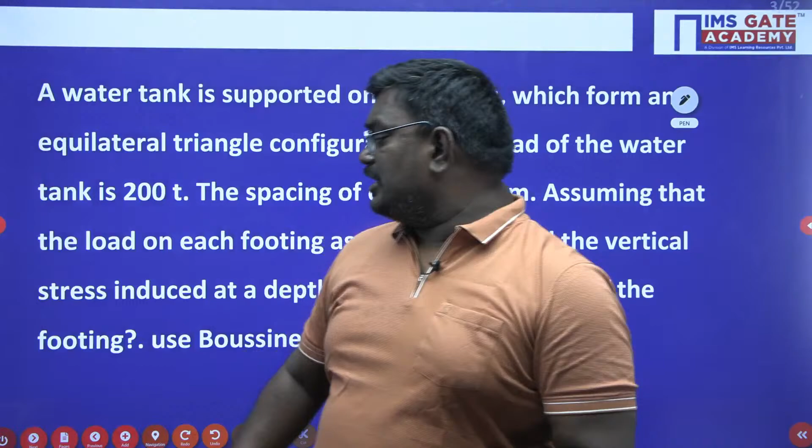Now see students, what is the agenda? In the top 10 challenging questions, we want to discuss the best questions. My dear students, always remember that whatever activity we do on the YouTube channel is from the perspective of students getting benefited. Now I don't want to waste your time, and I will quickly start the questions, students.

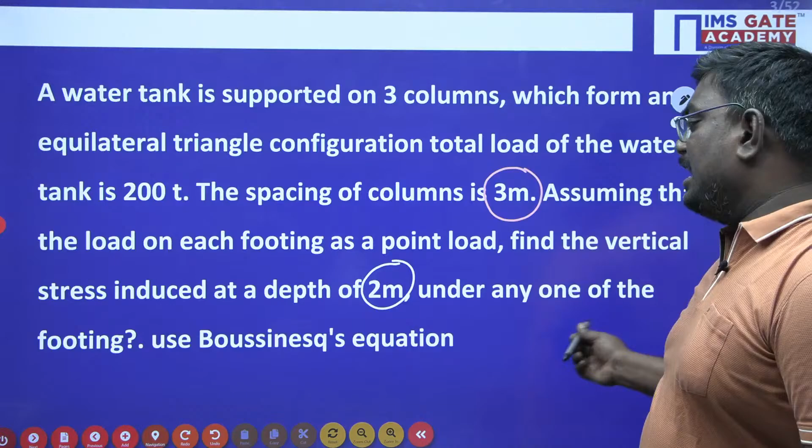Now the first question is: a water tank is supported on 3 columns which form an equilateral triangle configuration. The load of the water tank is 200 tons. The spacing of the columns is 3 meters. Assume that the load on each footing is a point load, and find the vertical stress at a depth of 2 meters under any one of the footings using Boussinesq's equation. So it is a very good question from the point of view of stress distribution.

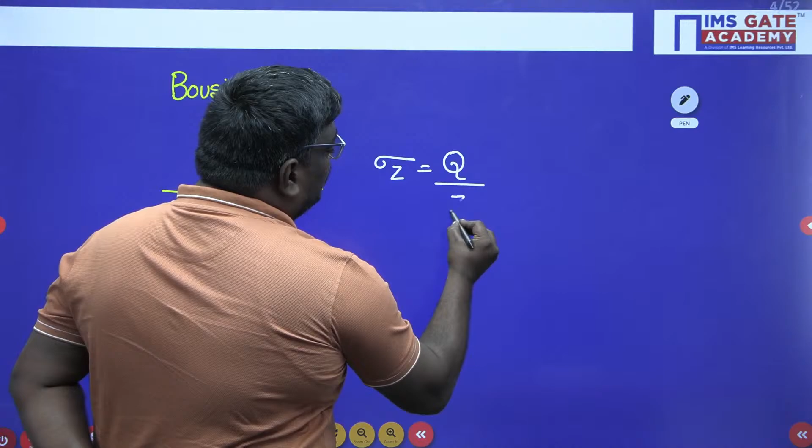Now my dear students, first let me tell you what Boussinesq's equation is before solving this problem. The equation is simple: Boussinesq's equation says that sigma z... suppose if I consider this as a soil strata and the depth of the soil strata as z, here we have a load Q, which is a point load, and the stress at a radial distance R at a depth Z. The formula you have to remember is sigma Z equals Q by Z square into 3 by 2 pi into 1 upon 1 plus R by Z whole square, whole power 5 by 2.

Now see students, this formula might be somewhat tough, but you have to remember this formula. Now what is R here? R is the radial distance, and Z is nothing but the depth of the soil strata.

Now let us discuss this question, students. There was a water tank which has 3 columns, and the water tank is carrying a load of 200 tons. Are you getting, my dear students? The water tank is carrying a load of 200 tons. Now see students, how much load has to be taken by each column is very important.

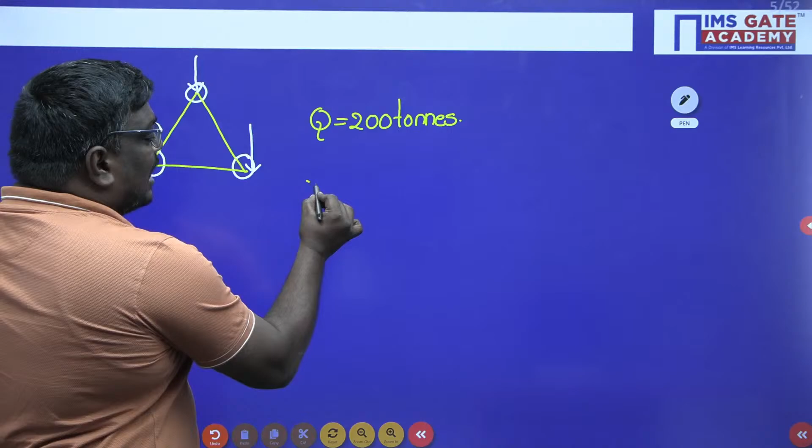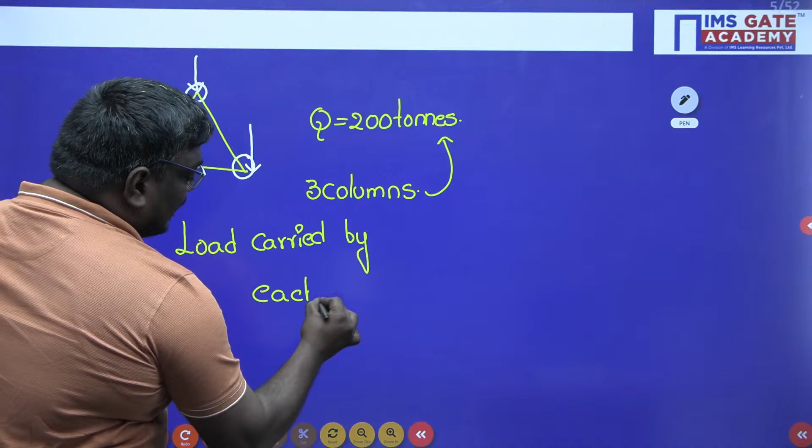Very good afternoon, Vishweshwar. So here there are 3 columns, my dear students, and the total load carried is 200 tons. So what is the load carried by each column is important. Load carried by each column can be taken as 200 upon 3. So there are 3 columns carrying 200 tons, so the load carried by each column is 66.66 tons, where T means tons.

Now my dear students, the spacing between the columns is evident, clearly they have given it as an equilateral triangle. So all the sides are the same, and the spacing between the columns is given as 3 meters in the problem.

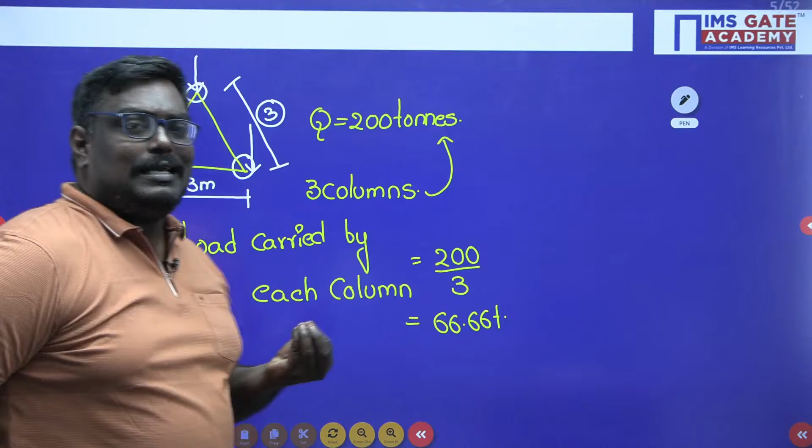Now what is this problem trying to ask, my dear students? What is the stress acting at any one of the columns when there is a point load acting on it? For easy calculation, I will assume this as first column, this as second column, and this as third column. You can assume any column as numbering - numbering is not an issue.

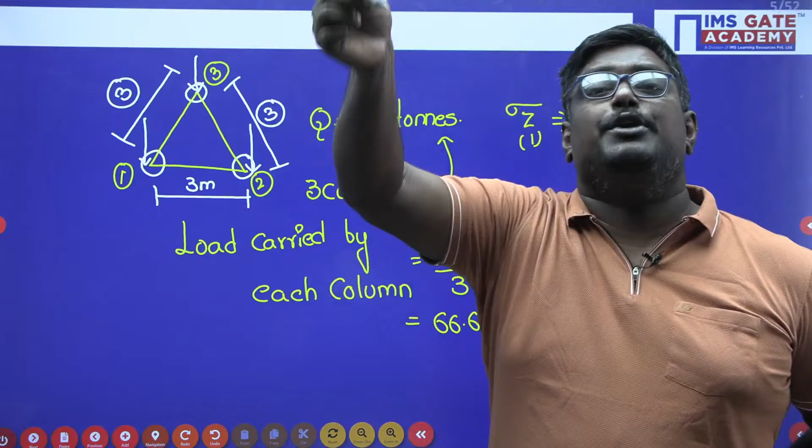But my dear students, when I explain the stress at a depth Z at column 1, you have to understand this logic: the stress of column 1 due to column 2, the stress of column 1 due to column 3, and the stress of column 1 due to its own load. So you can write the stress at a depth 2 meter on column 1. The beauty of this question is he has asked for the stress distribution on any one of the columns, not a particular column - it can be any column, my dear students.

So here the stress can be taken as sigma 11, that is stress on column 1 due to column 1; stress on column 1 due to column 2; and stress on column 1 due to column 3. So you have to find out these things.

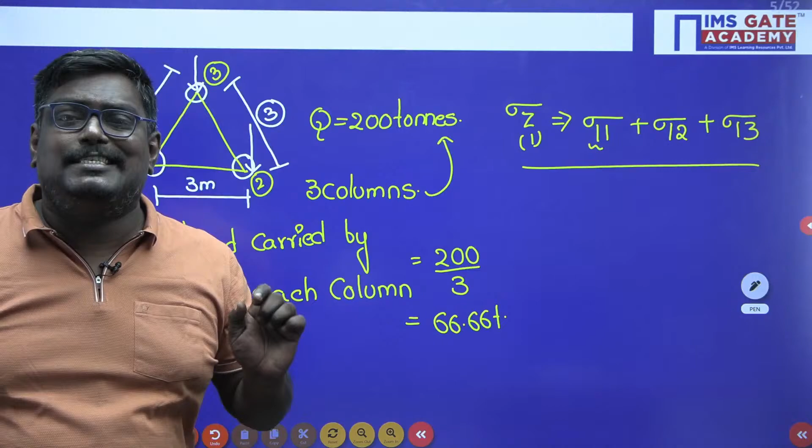Now my dear students, if the load is acting exactly on the column, for column 1 there will be no radial distance - radial distance will be 0. When I talk about column 1 and 2, there will be a radial distance of 3 meters, because column 2 is located at 3 meters from the first column. Similarly, column 3 is located at 3 meters. Now I hope you are clear.

Now see student, if I have to find sigma 11, the formula here is Q by Z square into 3 by 2 pi, into 1 upon 1 plus R by Z whole square, whole power 5 by 2. So this is the Boussinesq equation. Now my dear students, let us calculate what is the load here.

66.66 tons divided by Z square, which is 2 square because Z, they have asked you at a depth of 2 meters, into 3 by 2 pi. And this entire term will become 1 because R is 0 - if R is 0, this entire term becomes 1. Now if you solve this, my dear students, the stress on column 1 due to the load at column 1 will be 7.95 ton per meter square.

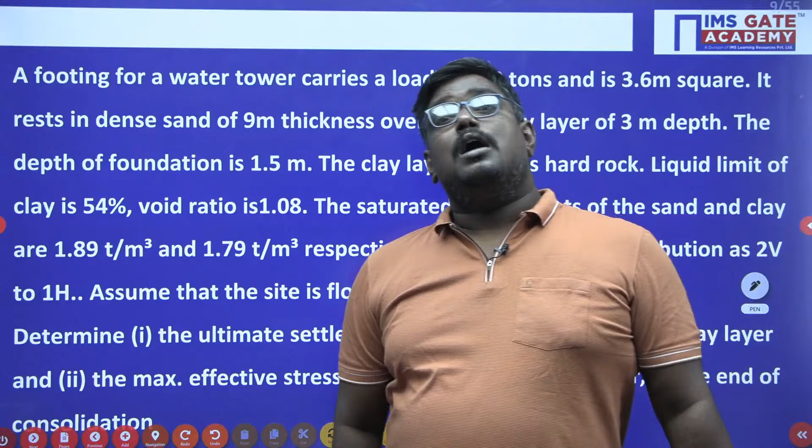So let us go on to the next question. My dear students, this is one of the beautiful questions in consolidation. Sir, what do you mean by consolidation? Remember, consolidation is nothing but the removal of water from the voids under a static long-term pressure. Now let me tell you one important thing.

The question is: a footing for a water tower carries a load of 900 tons and it rests on a dense sand of 9 meter thickness overlying a clay layer of 3 meter thickness. Depth of foundation is 1.5 meter. The clay layer has a liquid limit of 54 percent, void ratio 1.08, saturated unit weight of sand and clay are 1.89 and 1.79 ton per meter cube. Assume the load distribution is 2 vertical to 1 horizontal.

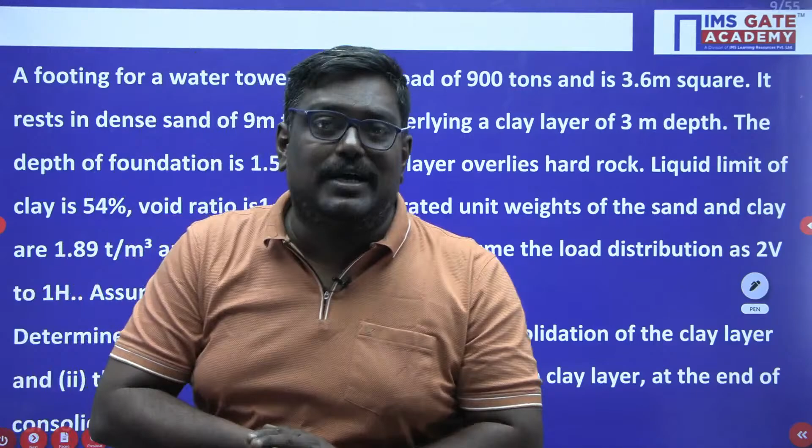Assume the site is flooded - this has a huge meaning, my dear students. It is my sincere request, whenever you are writing the GATE exam, you have to take a minimum 30 seconds, if the question is large, you have to read the question carefully and understand the given data.

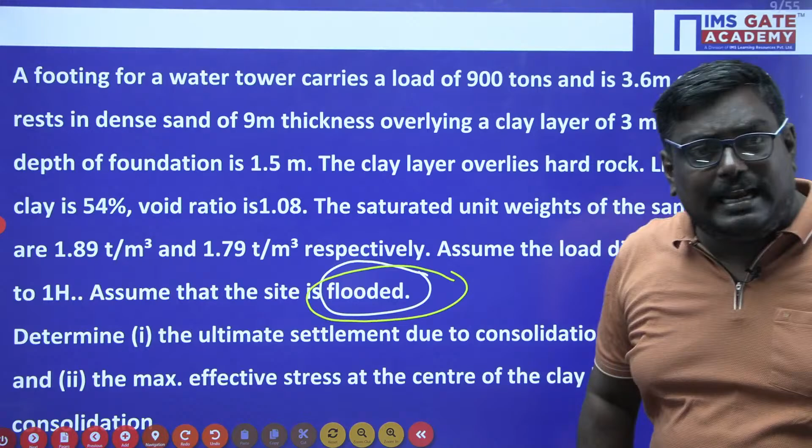Now, what is the ultimate settlement due to the consolidation of the clay layer? And the second one is the maximum effective stress at the center of the clay layer. So they have clearly asked us what is the settlement and what is the final effective stress. Now see, how do you calculate settlement?

Sir, whenever some question is asked, you have to understand - first they have asked you settlement, so what is the formula for settlement? Sir, in IMS Academy, we have done smart revision, formula sheet.

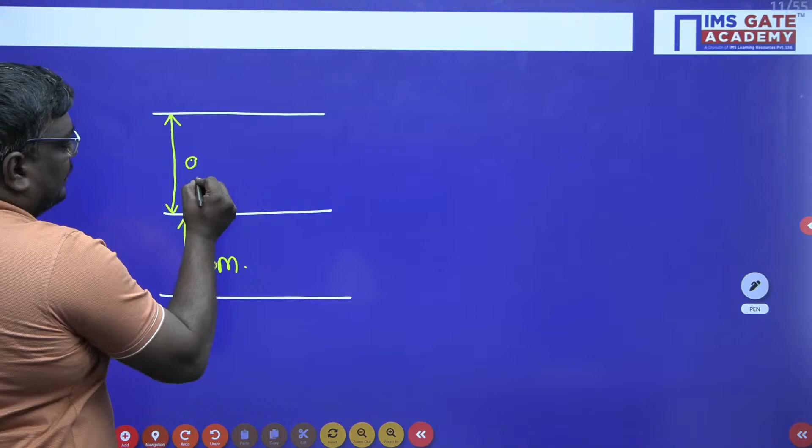On top of it, there is a sand layer of 9 meters. And for your information students, here we have a foundation which is of thickness 1.5 meter.

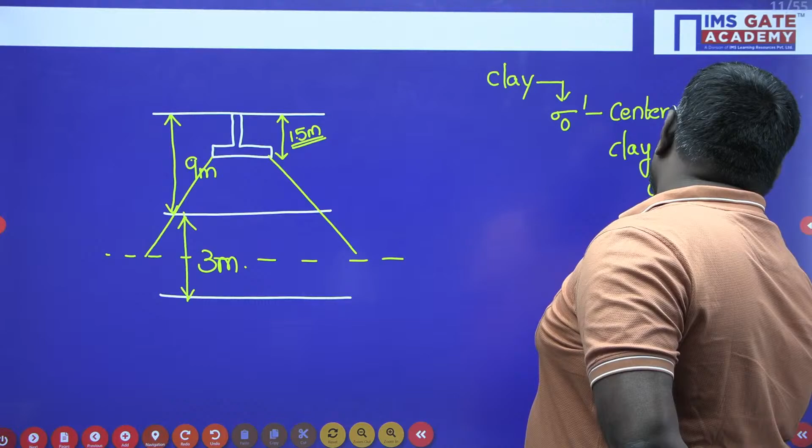Now we have to calculate the stress at the center of clay layer. This is a very important point in calculating the consolidation settlement for clay layers. Consolidation happens only in clay layers. And another important thing is effective stress should be calculated at the center of clay layer only.

Now here we have this is 1.5, so this is also 1.5. So this depth will be equal to 9 minus 1.5 is 7.5. Again 7.5 plus 1.5, so here this is 7.5 and this is also 1.5. So what is the total? Total will be equal to 9 meter.

Agree? Now how do you calculate the effective stress? The most important thing is it is flooded. Flooded means water table at top.

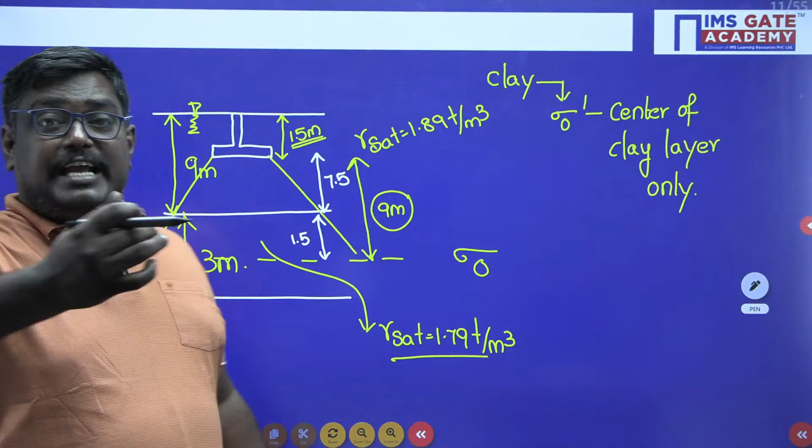Now the sand layer has gamma sat equal to 1.89 ton per meter cube, and clay layer, the saturated unit weight of clay is 1.79 ton per meter cube. If you have observed our quick revision or smart revision or GATE score booster, I have told you how to

calculate the effective stress. Whenever there is a water table, while calculating the effective stress, my dear students, gamma sat will be replaced by gamma dash.

So here you can write effective stress as gamma dash of sand, and the thickness of sand is 9 meter, plus gamma dash of clay, and the thickness of clay is 1.5 meter.

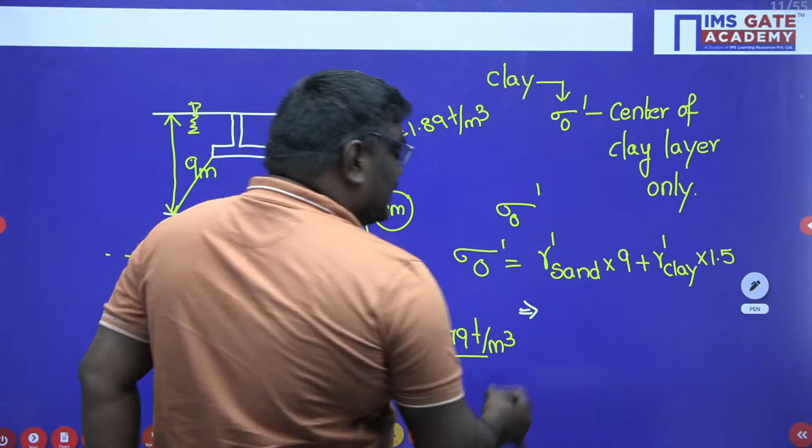Now see, what do you mean by submerged unit weight? It is nothing but the difference between the saturated unit weight and unit weight of water. So here we calculate as 1.89 minus 1 into 9, plus gamma dash of clay is 1.79 minus 1 into 1.5. Now see, 0.9 into 9 is 8.1, and 0.79 into 1.5 will be almost 1.

So if you solve this, you will get a value of 9.19 ton per meter square. So the effective stress sigma naught is very clear for you.

Now how do you calculate the final effective stress? Final effective stress is nothing but the initial effective stress plus the additional stress due to the applied load. Here it has applied a load of 900 tons, and it is a square footing for your information.

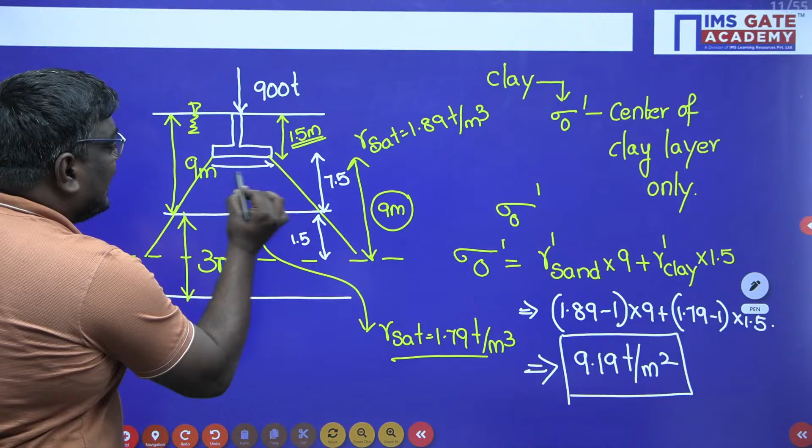So the width of the footing is 3.6. Now how is the distribution? Load distribution, 2 vertical, 1 horizontal. If I find this depth is anyhow 9, and I calculate this value, this will be equal to 9 by 2.

From similar triangle concept, if I take x and this as y, x by y can be written as 1 by 2, so x can be written as y by 2. Here y is nothing but 9 by 2. So the total width is 4.5 plus 3.6 plus 4.5, this will be equal to 12.6 meter. Am I correct or wrong?

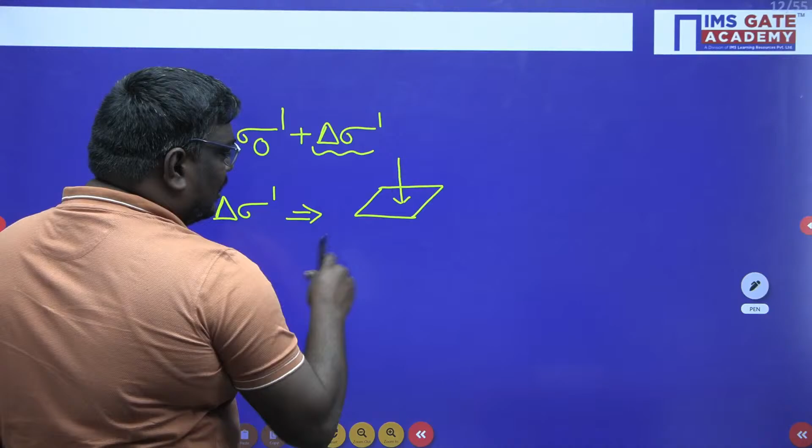So how do you calculate delta sigma? See here, how this will be seen in the problem. Suppose here there is a load acting and the load is supposed to distribute in this way, so it is a square of width 12.6 meter.

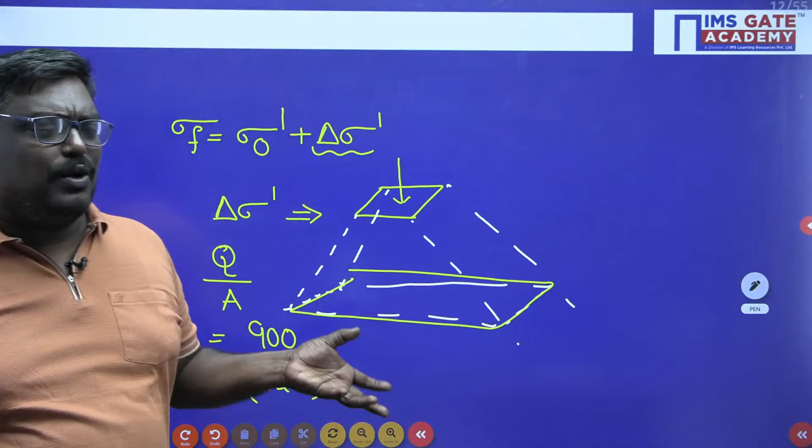Load is 900. Load upon area, load is 900 upon 12.6 square. If you see 12.6 square, it will be around 156 or something. 12 square is 144, 13 square is 169, so 12.6 squared will be around 160 or something.

If you calculate this, you will get a value of 5.67 ton per meter square. What is this value? Delta sigma is 5.67 ton per meter square.

So what is the final effective stress? Initial effective stress is 9.19 ton per meter square, and delta sigma is 5.67, so it will be around roughly 14.86 ton per meter square.

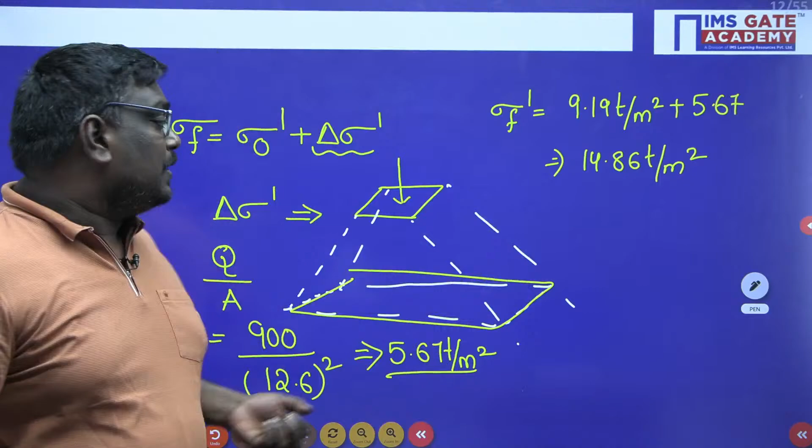So you have known each and every term in the problem. So let us solve here. Delta H is equal to, what is the formula? H into, what is H? Thickness of clay layer. H into Cc upon 1 plus e naught, into log of sigma final upon sigma initial effective stress.

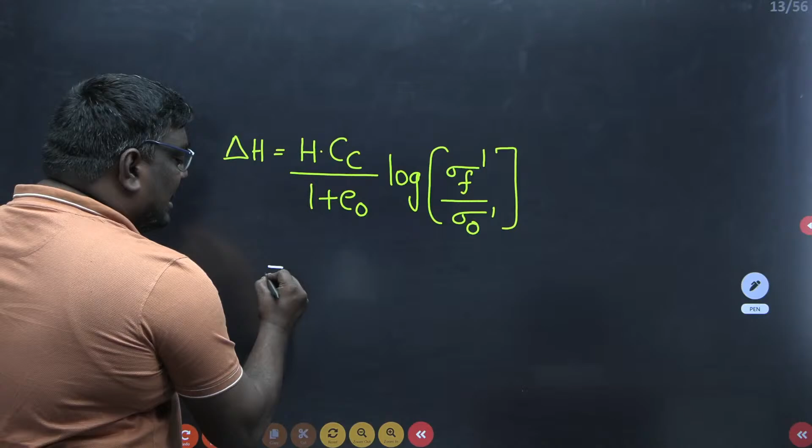So here, what is the thickness of the clay layer? The thickness of the clay layer is nothing but 3 meter. And what is Cc?

0.396 upon 1 plus void ratio is 1.08 into log of sigma final. What do you mean by sigma final here? 14 point, how much sir we got? 14.86 I think. 14.86 upon sigma initial is 9.19 ton per meter square. You will get a value of 0.119 meter. And if they ask you in mm, so 119 mm is the settlement.

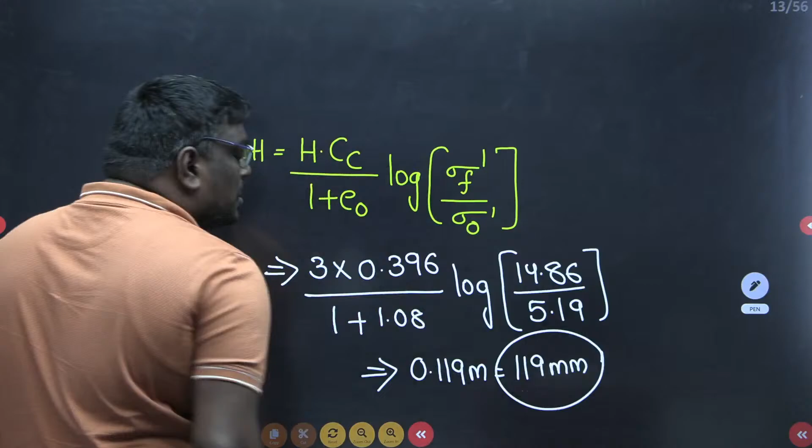So my dear students, let me tell you what are the key pointers in this problem. Whenever they ask you settlement, delta H can be taken as H into Cc upon 1 plus E naught into log of sigma final upon sigma initial. And remember my dear students, H should be taken as thickness of the clay layer.

Effective stress should be calculated at the center of the clay layer. Final effective stress is initial effective stress plus delta sigma. Delta sigma is a kind of stress which is induced due to the load acting. If you calculate the effective stress, it is due to the self weight of the soil, whereas delta sigma is due to the application of the load. When you keep these points in your notebook, definitely you can solve the problem. I hope you are clear, my dear students.

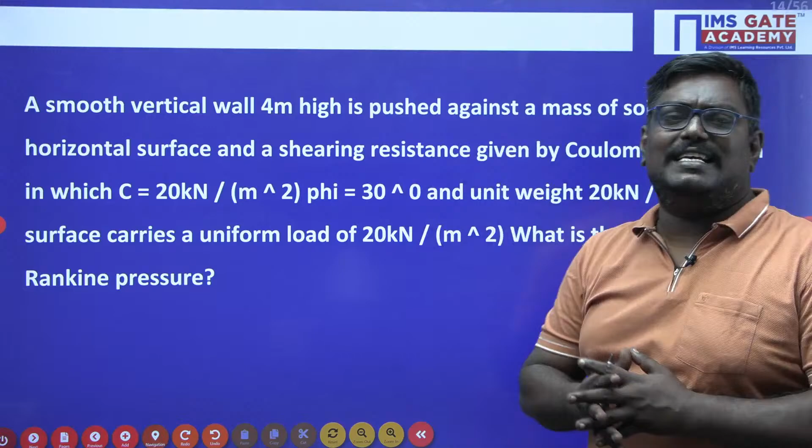Now, let us understand ourselves. Actually, if you see, the question is very simple here. A smooth vertical wall is pushed. This is a very interesting question. In 2021, we have seen this kind of question, my dear students.

Sir, when you are pushing something, it is passive. When you are pulling something, then it is active. When it is stationary, it is at rest pressure. So, my dear students, they will not directly tell you to calculate active pressure, passive pressure or at rest pressure. It's based on the yielding of the soil mass. If the yielding of the soil mass is due to stretching, then it is active earth pressure. If the yielding of soil mass is due to compression, then it is passive earth pressure. If there is no yielding, then it is at rest pressure.

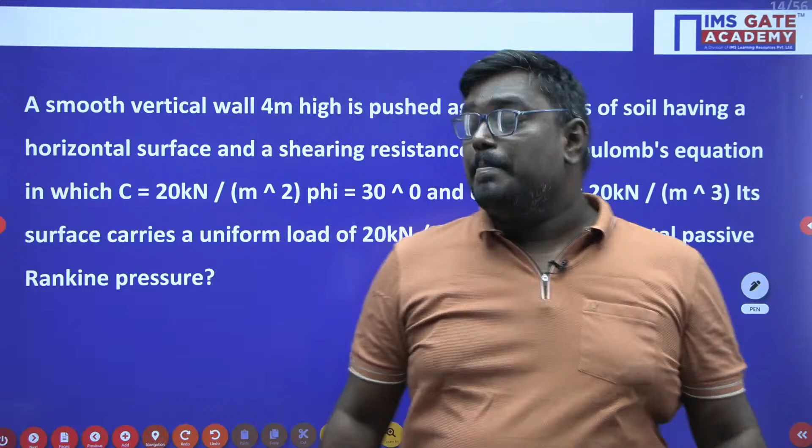So, here shear angle of resistance is C 20, phi 30 degrees, unit weight 20, surface carries 20. What is the total passive earth pressure? Now, let us understand. Sir, we have to calculate the total passive pressure and I will tell you how to calculate the force also. Now, what are the key points to solve this problem?

Sir, this is very important. Whenever you are solving a problem, solving it in a generic way is very important. What do you mean by generic way is, if that question is asked in n different ways, using this generic method, you can solve the problem. So, my dear students, in GATE exam, there is no point of short trick. It is application oriented learning. You have to come up with the application, then you have to come up with the short trick.

Okay, now here, let me tell you what is the point here. First, calculate the coefficient of earth pressure. What sir? What is the first step? Calculate the coefficient of earth pressure. So here, how do you calculate the coefficient of earth pressure, my dear students? Okay, sir, see, how do you calculate the coefficient of earth pressure is Kp.

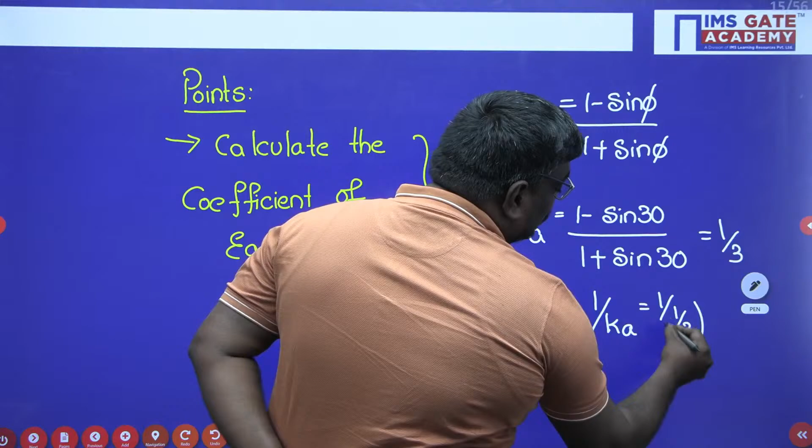So it is evident that, sir, again we have done one mistake. Is it Kp equals 1 minus sin phi, or should it be Ka? You can write here Ka, because Ka formula is 1 minus sin phi upon 1 plus sin phi, right? So Ka will be equal to 1 by 3. But remember, Kp will be equal to 1 upon Ka. So Kp will be equal to 1 upon 1 by 3, so that will be equal to 3. So remember students, how do you calculate the coefficient is very, very important.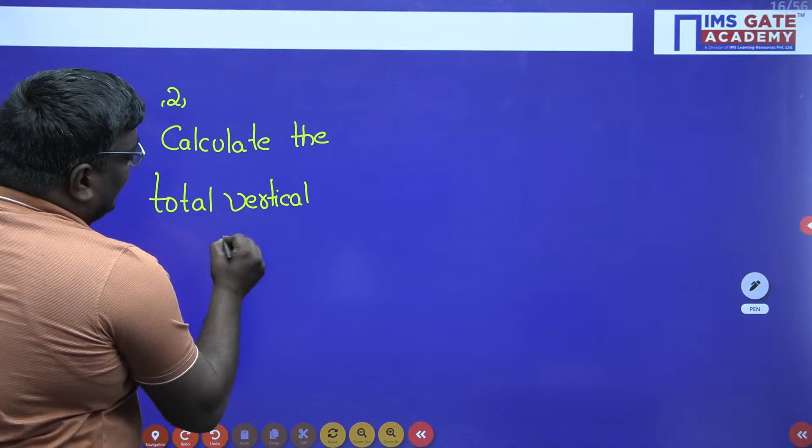So we have calculated the coefficient. Now let me tell you the second step. Second step is calculate the vertical stress, or calculate the total vertical stress. What sir? Calculate the total vertical stress. My dear students, how do we calculate the total vertical stress, sir? Can anyone tell me? So here, it was a retaining wall of height 4 meters. It carries a surcharge loading of 20 kilonewton per meter square.

There is no water table here, luckily, so we can take directly. Gamma is taken as 20 kilonewton per meter cube. And the depth of the soil strata is 4 meter.

Now, how do you calculate the vertical stress? The vertical stress at top due to surcharge will be equal to 20. At bottom, this value will be equal to 20 plus gamma into Z, so 20 into 4. So the actual stress at bottom is 100.

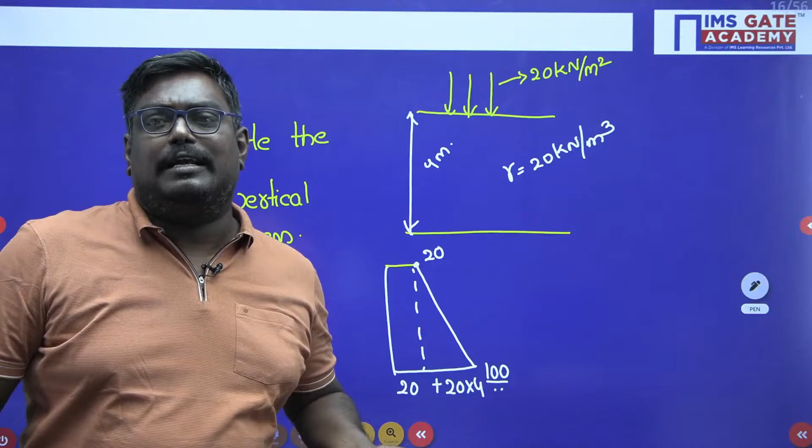So the second step is nothing but calculating the vertical stress. Once you are done with the vertical stress, now calculate the active or passive earth pressure. Here it is passive, so calculate passive earth pressure. If it is passive, you have to calculate passive. If it is active, you have to calculate active.

But remember, my dear students, here you have to understand whether it is a cohesive soil or cohesionless soil. If it is a cohesive soil, the formulas are different. So here, active passive pressure.

Passive pressure is given as Kp into sigma V plus 2C root Kp. This is the passive pressure formula for cohesive soils. Here the coefficient of passive pressure is 3.

So the vertical stress diagram, if you remember, the value at top is 20, the value at bottom is 100. Let me calculate the value at top. Passive pressure at top is 3 into 20 plus cohesion is given as 2 into 20 and root Kp is given as root 3.

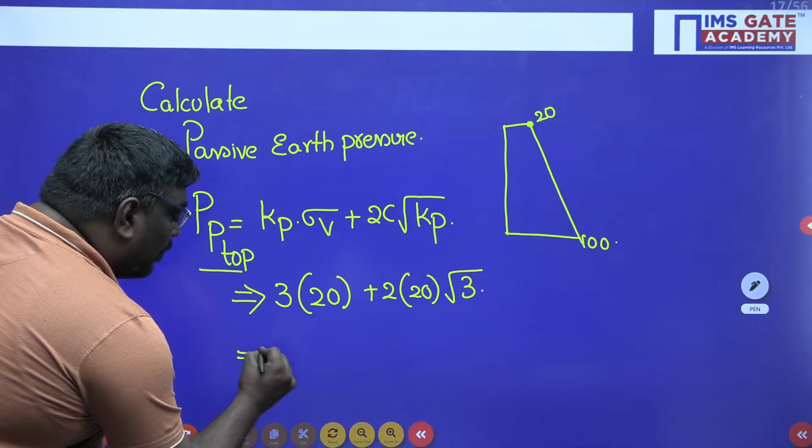What is the value of root 3? It is nothing but 1.732 or 1.73. If you see, 60 and this is 69.28. Now, passive pressure at top is given by the formula as 129.28. What is the passive pressure at top? It is given as 129.28.

Now, how do you calculate the passive pressure at bottom? It is given by the formula Kp into sigma V plus 2C root Kp. What is the value of vertical stress at bottom? The value of the vertical stress at bottom is 100. So just plug in these values in the formula: 3 into 100 plus 2C, 2 into 20 into root 3.

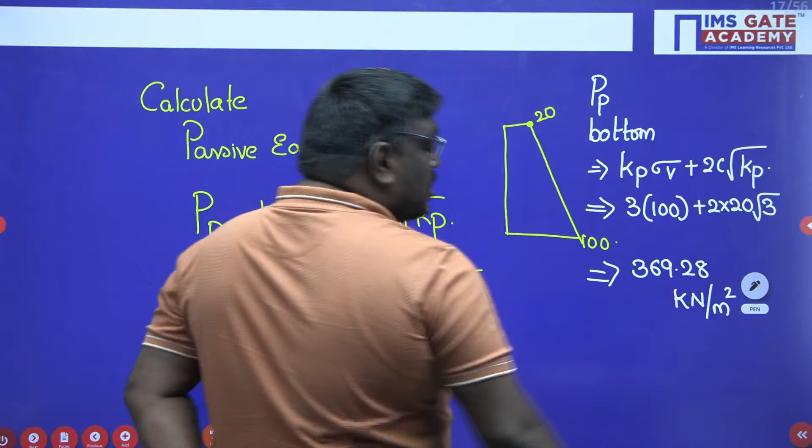When I plug in these values in the formula, you will get a value of passive pressure at bottom of 369.28 kilonewton per meter square. Agree? Very good. So here, the passive pressure at top and also at bottom is clear.

Now, how do you calculate the force? First, once you have done the passive pressure calculation, just draw the diagram here. So the pressure at top is 129.28, and at bottom it is 369.28, and the height of the vertical wall is 4 meter.

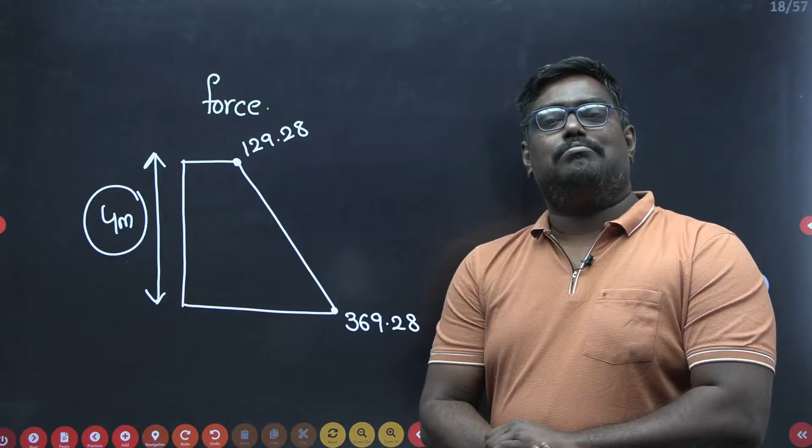Now let me tell you how do you calculate the force. The force is nothing but the area of the pressure diagram. So it is a trapezoid in shape. The force can be taken as half into H into A plus B, where A and B are the sides of the trapezoid. So just substitute, the height is 4 meter. So half into 4 into the sides here.

129.28 plus 369.28. This will be taken as 2. So 369.28 plus 129.28, here 0.72, 0.72, so 1.44 into 2, 2.88. If you do this calculation, you will get a value of 997.12 kilonewton per meter. So the units are important.

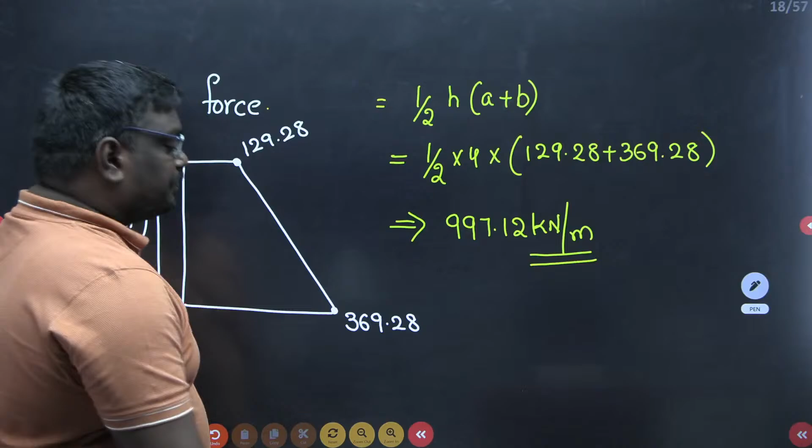So what is the force? Force is nothing but the area of the pressure diagram. Now what is the fifth point? Where does this force act? Force acts at its centroid.

When I talk about centroid, when you are studying engineering mechanics, you will have a better idea or perspective. You divide this into a rectangle and a triangle and calculate the centroid of a composite section. But if it is a trapezoid section, it is given directly by the formula h by 3 into 2a plus b by a plus b. Usually I don't want to teach through the formula, but still for your easy understanding I am telling.

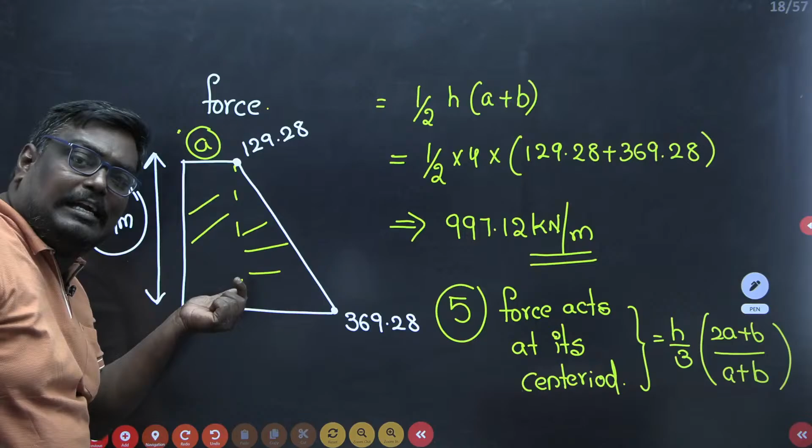See students, if I take a as this one, the centroid will be from bottom. If I take this as b, the centroid will be from top. So you should be very careful what should be the a term. If you are confused, divide this into rectangle and triangle and do it as a composite section.

Now h is how much here? If I use this formula, I can get 4 by 3, and a is given as 2 into 129.28 plus 369.28 upon 129.28 plus 369.28. This will be 0.72, 0.72, 1.44, so 498.56. And if you solve this, it will roughly be in this bracket, you will get 1.3, and 1.3 into 1.33 gives a value of 1.69 meter.

If you are preparing for IES, calculations are also very important because no calculator is allowed there. But for GATE, at least you will have a virtual calculator. My suggestion is to be accustomed with the virtual calculator. If you are not aware of it, in one of our playlists we have shown how to use the virtual calculator, which will save you around 5 minutes. Using it adds value in speeding up your calculations.

Now I hope this problem has created an awareness of how to solve a problem on earth pressure. Let me tell you the steps in earth pressure. First, calculate the coefficient of earth pressure - I should say calculate the respective coefficient, because in this problem it is passive. So you calculate the passive coefficient. If it is active, calculate active. If it is at rest, calculate at rest.

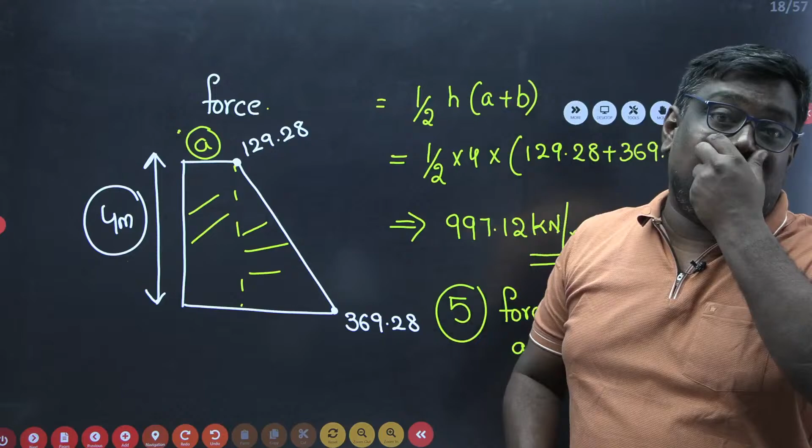Second, you have to calculate the vertical stress. After finding the vertical stress, there can be a challenging question if a water table is present. Remember, vertical stress should be written as effective stress plus pore water pressure, because you cannot multiply the coefficient of earth pressure with pore water pressure. We multiply with the coefficient because we are resolving the vertical stress into horizontal stress. But Pascal's law states that pore water pressure is the same in all directions, hence we need not multiply with K.

This is very important - in IIT Delhi, nowadays we don't have any interviews, but in some IITs when we did have interviews, this was one of the questions asked about 10 years back.

Now, the third step is to calculate the earth pressure. The fourth point is the area of the pressure diagram, which is the force. The fifth point is calculating the centroid to find the moment. If you have any issue finding the moment of inertia or any problem in engineering mechanics, we also have engineering mechanics videos in the playlist which you can watch.

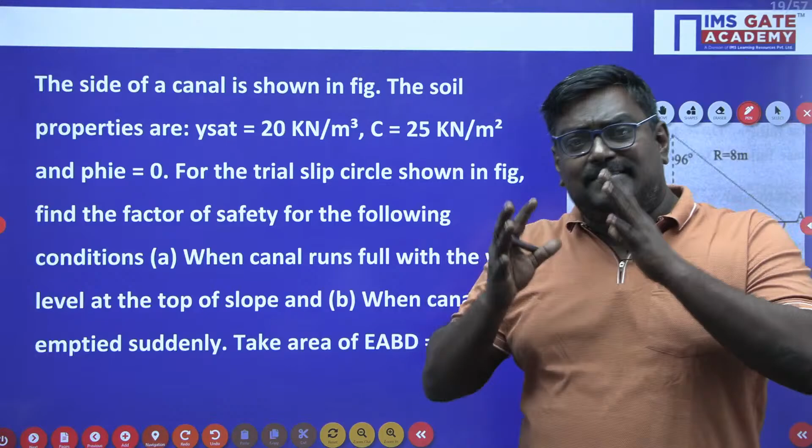Now let us go through the next question. Whenever you are reading a GATE question, try to understand the perspective, try to understand the key points, and how this problem can be solved in a generic way. I hope you are clear.

Now, the side of a canal is shown in the figure. The properties are 20 kilonewton per meter cube, C is 25 kilonewton per meter square, as shown in the figure. When the canal runs with full water level, and when the canal gets emptied suddenly, EABD area is given as 33 meters square. Now, why do we want to study the topic called stability of slopes?

In stability of slopes, we have two types of failures: rotational failure and translational failure. In this problem, it is a rotational failure. So how do you calculate the factor of safety for rotational failure? I would be happy if anyone comments in the comment box. Rotational failure occurs in a curved surface. The factor of safety for rotational failure is given by the formula: resisting moment upon driving moment.

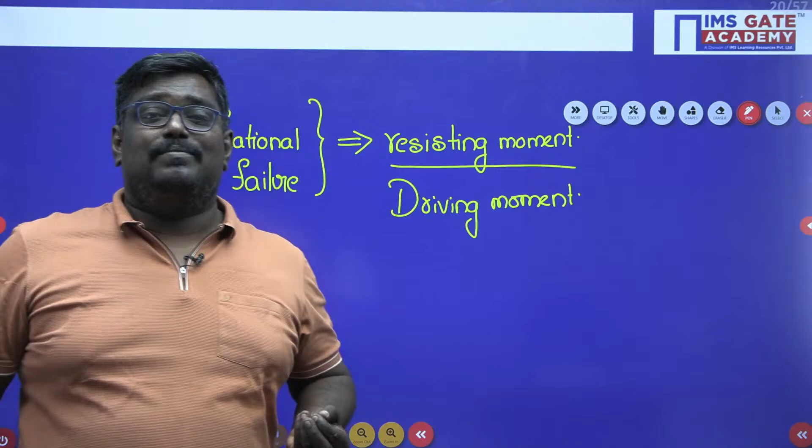Some people will ask me, sir, when writing the GATE exam, how do I remember this formula - is it driving moment upon resisting moment, or the other way? The logical thinking behind it is important to remember.

The factor of safety is always greater than 1. For the factor of safety to be greater than 1, you should ensure that resisting moment is greater than driving moment. If your resisting force is more, definitely failure will be less, or there are less chances of failure. So, my dear students, this is how you have to learn.

So, factor of safety is nothing but resisting moment upon driving moment. Now, here in the problem, he has given phi is equal to 0 analysis. Sir, what does it mean, phi is equal to 0 analysis? Let me tell you, shear strength is a function of effective stress. When you write shear strength, it is C plus sigma dash tan phi. That means when he told in the problem that phi is 0, this entire term will be 0. That means the resisting force will be taken care only by C.

Sir, you might have studied in friction also. Based on the surface, your coefficient of friction will be validated. Here, the resisting force will be taken by shear strength, and the shear strength is controlled only by cohesion. Actually, shear strength is controlled by cohesion and friction. But my dear students, here phi is 0.

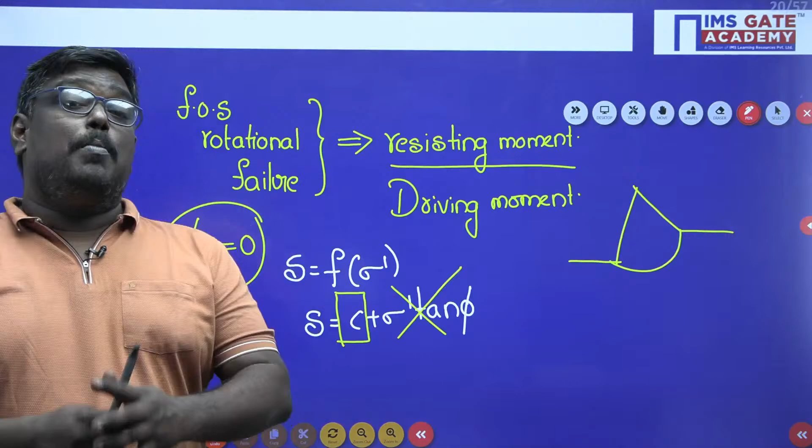So, resisting moment, if I talk, it is occurring along a curved surface. So, what is cohesion? It is nothing but a stress. What is moment? Moment is nothing but force into perpendicular distance. Are you following, my dear students? Moment is nothing but force into perpendicular distance.

So, here when I talk about resisting moment, you can write C into L into 1. This is stress, L into 1 is area, and it is located at a rotation at a distance of R. So CLR will be your resisting moment.

Driving moment is what is trying to force you. If you are climbing a mountain, when you are falling down, due to self-weight, you will come down. So driving means is always due to your self-weight, W into X bar. X bar is the center of gravity distance. So here, what is the factor of safety formula? CLR upon W into X bar.

Now see students, it's my sincere advice in GATE exam. Whenever you are solving a problem, the concept behind is very important. How generic you can solve the problem. What are the terms associated. How this question can be asked. These things will help you to brainstorm yourself to do the GATE questions.

So here factor of safety is nothing but CLR upon W into X bar. Here CLR, everything is given. Weight, how do you calculate? That is the beauty of this problem, sir.

Now see students, when canal runs with full of water, sir, it says that this is the first case. When canal is run with full of water, it is evident that it is a saturated soil, because voids are completely filled with water. So you have to take the saturated unit weight. So gamma sat can be written as weight upon volume.

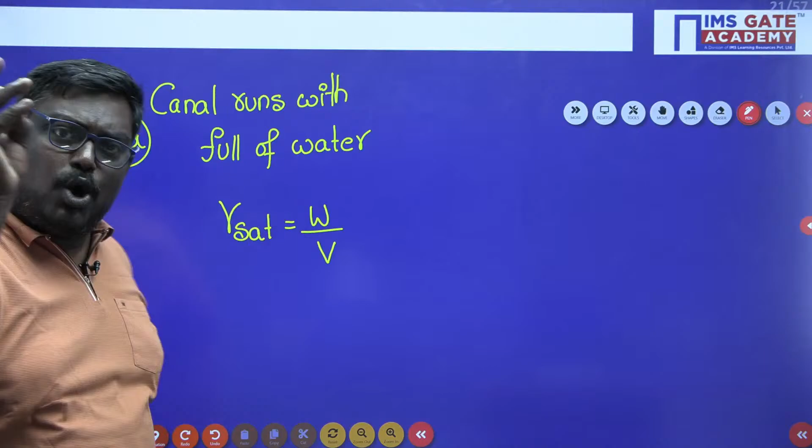Now my agenda, I know cohesion, I know length of the arc, I know the radius, but I don't know the weight. So our intention is how to find out the weight. So weight can be written as gamma sat into volume. And how do you write this volume? This is written as gamma sat into area into 1 meter. Here in the problem they have given gamma sat as 20 into 33 into 1.

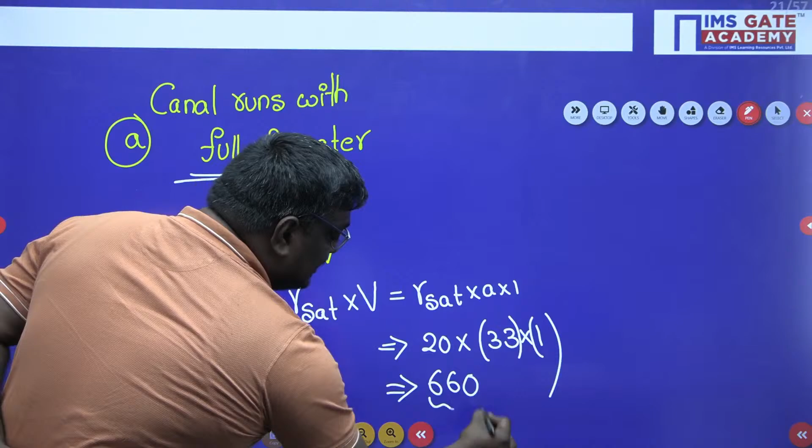Now see student, here what is, sir, when canal runs with full water. If I take gamma sat, this will come with what, sir? 660. But let me tell you, this will come for sudden drawdown. This will come for sudden drawdown. I'll tell you why I have written like this also. This is for case 2, sir.

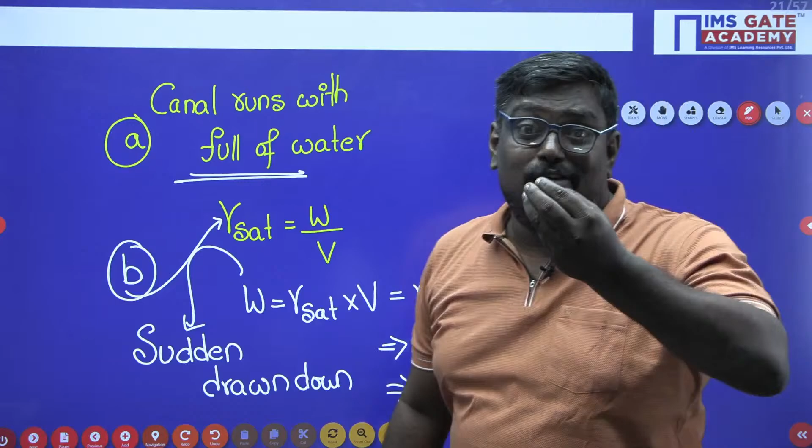If you are taking sudden drawdown, then you will use gamma sat. Now what? Then you have to ask yourself what you will do when canal runs with full water. Now I told you one question, students. Whenever you are calculating the effective stress, it is calculated by taking submerged unit weight into account if the water table is present. Now here water table is present.

In sudden drawdown, tank is full of water. What is the condition? Saturated. Now it is getting empty. But here it is a submerged unit weight case. So in this case, I will take gamma dash, which is equal to gamma sat minus gamma W.

Here I will assume for my easy calculation, gamma W as 10. Don't ask me, sir, if we have to take 9.81. Just for my easy calculation, I am taking it as 10. So you can take it as 20 minus 9.81. So this will be equal to 10.19 kilonewton per meter cube.

Now, if we calculate gamma dash, which is equal to weight by volume, taking it as 10, weight is equal to gamma dash into volume. So 10 into 33 into 1, it will be equal to 330 kilonewton.

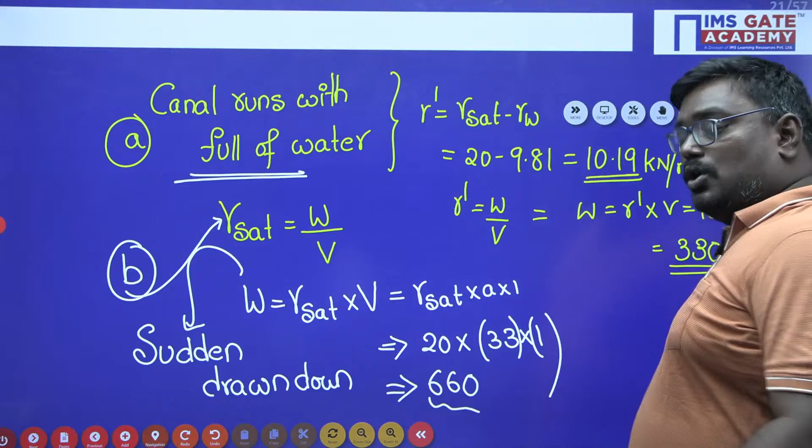So you are clear now, sir. What are the cases? When the canal runs with full water table, you have to take gamma dash. When the canal gets emptied suddenly, you have to take gamma sat. Now let us understand how to calculate the factor of safety for case 1.

For case 1, it is given by the formula C into L R upon W into X bar. Cohesion is given as 20. Length of the arc, theta is given as 96 degrees. To convert into radians, multiply by pi by 180, into length R, this is theta. Sir, if you have a radius R and angle theta, the length of arc is given as R theta.

So for 20 L, our radius is 8 meters and theta is 96 degrees. I will convert into radian: pi by 180 into radius 8 meter, upon weight 330, and X bar is 2 meters, I think. One second, let me see the diagram. X bar is 2 meters.

So if you solve this, you will get factor of safety as 4.06. How much value will you get, my dear students? You will get a value of 4.06.

Now, how do you calculate in the second case? In sudden drawdown, instead of 330, it will be replaced by 660. So actually it will be reduced to half, and the factor of safety will be equal to 2.03.

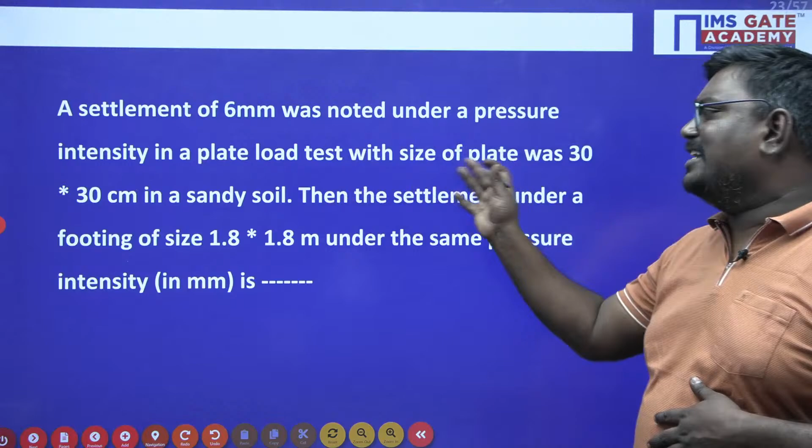Now let me explain, my dear students. A settlement was observed under a pressure of certain load intensity with a plate of size 30, and the settlement under a footing of size 1.8 by 1.8.

Now let me explain, what do you mean by ultimate load, and what do you mean by settlement? The problem seems very easy, but you should know the concept here. That is the reason I have taken these questions.

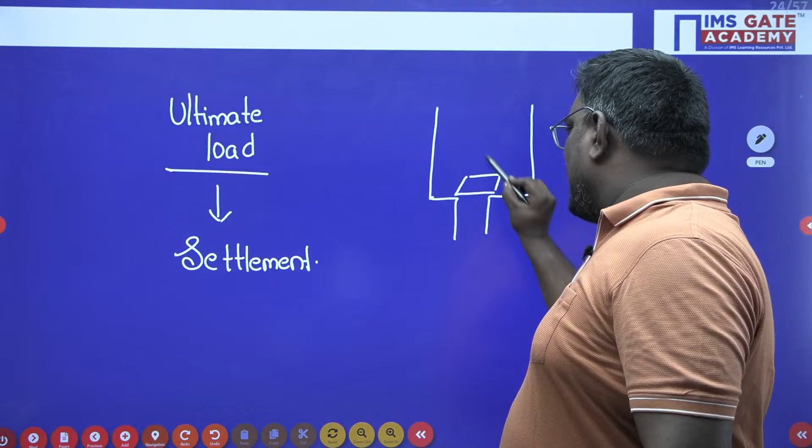Now, I have taken a site. This is my excavation pit. Here I have kept a plate and I am trying to apply the load, the load at which the plate starts sinking. I will apply 10 kg, 20 kg, 30 kg, 40 kg. At 40 kg, the plate starts sinking. That load is called the ultimate load — the load at which the plate starts sinking.

How much the plate has sunk, that is nothing but the settlement. So, my dear students, the agenda of the plate load test is to find out the ultimate load as well as the settlement.

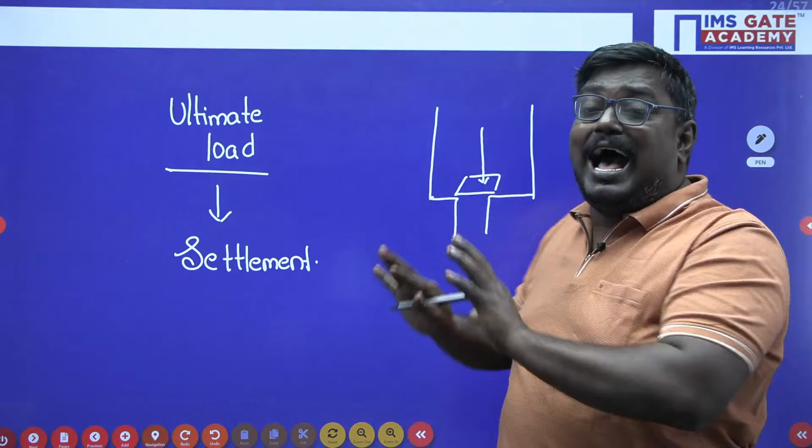So here we have two different formulas to calculate the settlement. Settlement is given by the formula SF by SP is equal to BF, breadth of the foundation, upon breadth of the plate. This formula is for clayey soils.

When I talk about sandy soils, my dear students, SF by SP is equal to breadth of the foundation upon breadth of the plate plus 0.3, upon breadth of the foundation plus 0.3, whole square.

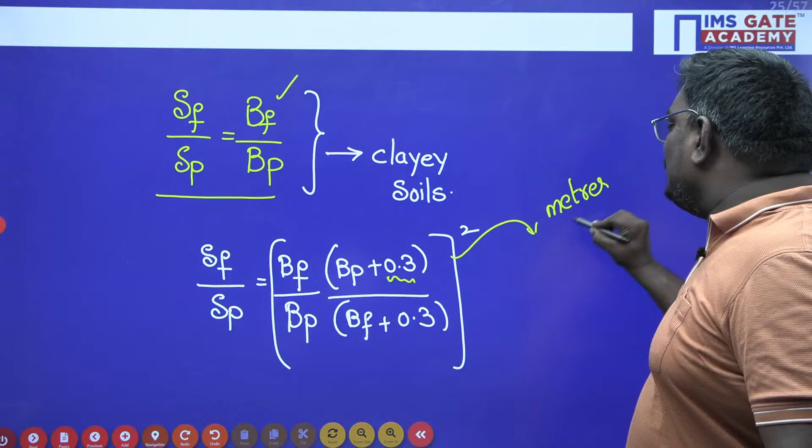And here let me tell you one important thing: the breadth of foundation and plate should be substituted in meters. Again, the important note in this formula — sir, it's a ratio, so if you substitute in meter or centimeter, it is okay because both should be in the same units and they cancel. But here there is a factor called 0.3, and due to that, they have considered this formula taking breadth of foundation and plate in meters only. So the breadth of the foundation as well as the breadth of the plate should be considered in meters only. Are you agreed, my dear students?

Very good, very good. So here let me do settlement of the foundation. Settlement of the plate is 6 mm. Sir, units are important — that is the reason I have taken this simple question.

And it was asked 2 times in GATE exam, sir. Sometimes what happens with students, let me tell you a small story. When you are running a 100-meter stretch, you prepare for a 5-kilometer run. Similarly, you should not overthink. There are some basic standard questions which are mandatory to learn, so you have to prepare to an extent. Even if it is difficult, you can solve it. But you should never leave the basic and standard questions. Keep that in mind, my dear student.

So here SF by SP is equal to breadth of the foundation, 1.8, upon breadth of the plate, 0.3, because the plate given is 30 centimeter, not meter, so 30 centimeter is 0.3 meter. So it becomes 0.3 plus 0.3 upon 0.3, upon 1.8 plus 0.3, whole square.

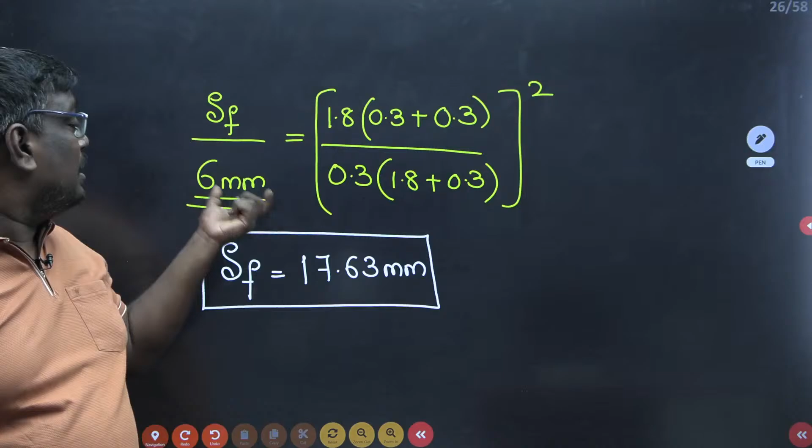Let me tell you the observation you have to see here: this is a ratio, it doesn't have any units. But settlement is given in mm, so the settlement of the plate is in mm, and so the settlement of the foundation is also in mm. I hope you are clear with this problem. Very good, very good.

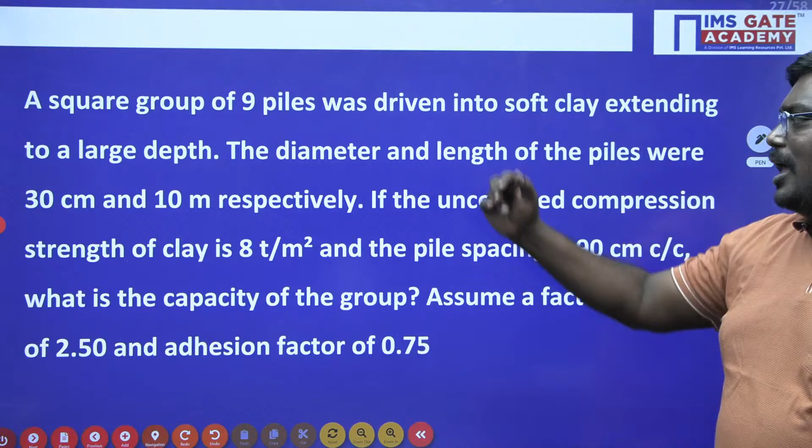Now, my dear student, there is another question. Just read the question: A square group of piles, 9 piles were driven in a soft clay to a large depth. The diameter and length of the piles are 30 centimeter and 10 meter respectively. The unconfined compressive strength is 8 ton per meter square, the spacing between the piles is 90 centimeter, the factor of safety is 2.5, and adhesion factor is 0.75.

So my dear students, it is an interesting problem. It is a question asked in pile foundation, and they are asking about a topic called group capacity. When I talk about group capacity, what do you mean by it?

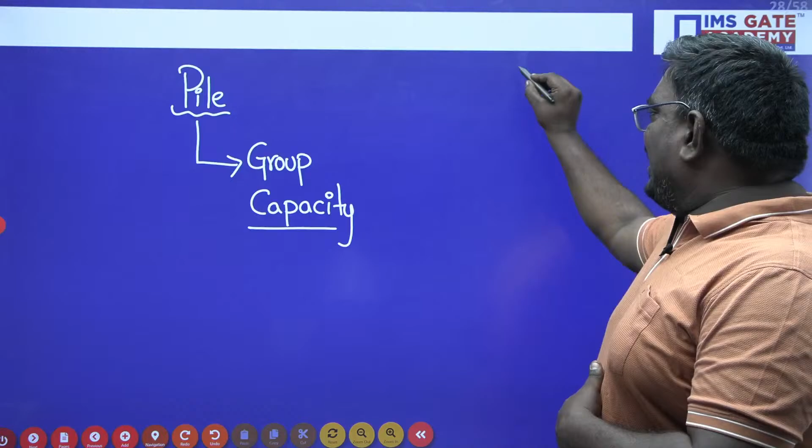Group capacity - there are two things, sir. When you talk about a group of piles, most people think the group capacity will be equal to the sum of the individual capacities of the piles. That means if group capacity is capital X, you will take it as x1 plus x2 so on xn, where x1, x2, xn are the individual carrying capacities of the piles. It is absolutely wrong, it is never equal to this. Why? Because of stress overlap. The stress overlap will not allow this - practically the group capacity of piles is never equal to the sum of the individual capacities.

Here there are two chances of failure: one is the individual failure, and the other is the block failure. One is individual failure and block failure.

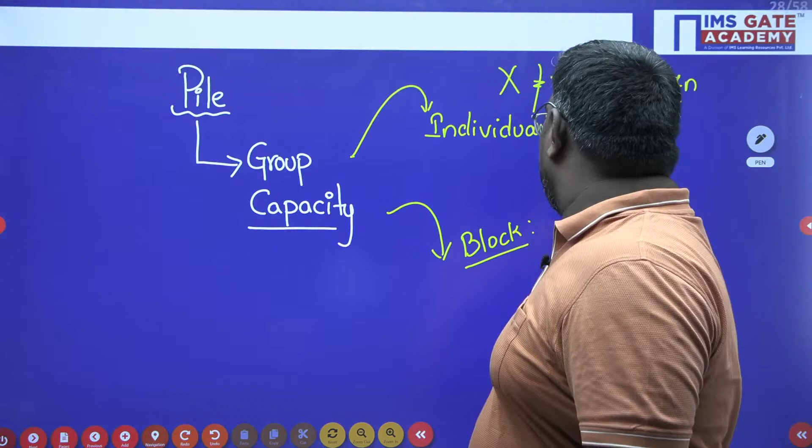Now see students, the beauty of the question in any structural or civil engineering is: when you design something, you design for higher loads, but when you allow something, you allow lesser. That is why the LSM method is appreciated - I'm talking about RCC - when you ensure double safety and most economical design, that section is most efficient. So here with two failures, individual and block, calculate the values separately and whatever is minimum will be your answer.

So when I talk about individual failure, group capacity for individual failure is N into QU. So you can say N into FB into AB plus FS into AS. How many piles are there in that question, my dear students? In that group there are 9 piles.

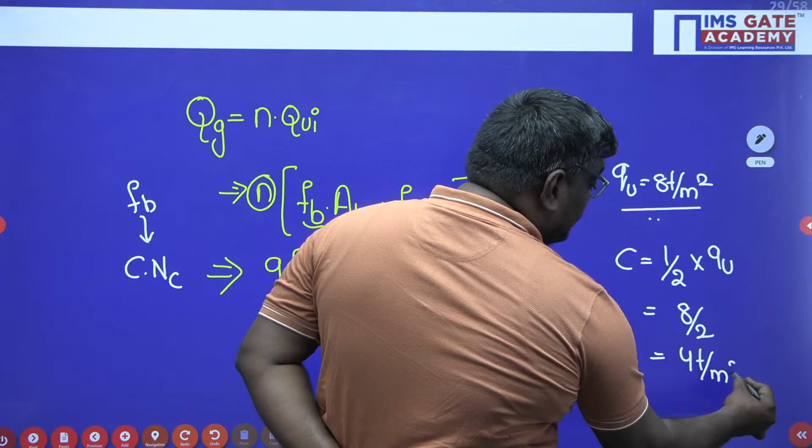What is FB? For clays, remember this is important: FB for clays is given as C into NC. In this problem, they have given unconfined compressive strength as 8 ton per meter square. When unconfined compressive strength is given, cohesion equals half of it, so this will be 8 upon 2, equal to 4 ton per meter square. Remember this, students, because on overlook this mistake happens - people tend to take the value as 8 directly. But when unconfined compressive strength comes into picture, cohesion is half of it. So here C is 4, and NC value is standard, that is 9.

And AB, area at the base, is pi by 4 d square. The diameter of the pile given in the question is 30 centimeter or 0.3 meter.

FS is alpha into C. Alpha is the adhesion factor, which is given as 0.75 into 4 into pi d l. D is 0.3, length is 10 meter.

This is the value of group capacity considering individual failure. Considering individual failure, this is the group capacity. I hope you are clear.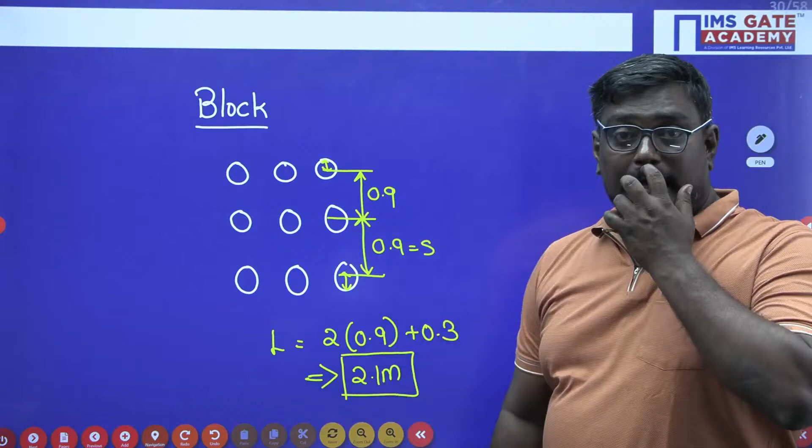Now let me tell you what is the area of the block. Area of the block will be equal to the area of a square, which is nothing but S square. So this will be equal to 2.1 square, that will be equal to 4.41 meter square.

When I talk about surface area, it's not a circle, it is a square. Perimeter is 4S into length of the pile. So it is equal to 4 into 2.1 into 10, that is equal to 84 meter square.

So surface area is 84, area at the base is 4.41. Now, how do you calculate the block group capacity? Group capacity is given by the formula FB into capital AB plus FS into capital AS.

Now, when I talk about FB into capital AB, C is 4, NC is 9, AB is 4.41, plus FS alpha C, 0.75 into 4 into 84. 0.75 into 4 is 3, 3 into 84 is 252. If you do this, you will get a value of 410.7 or something.

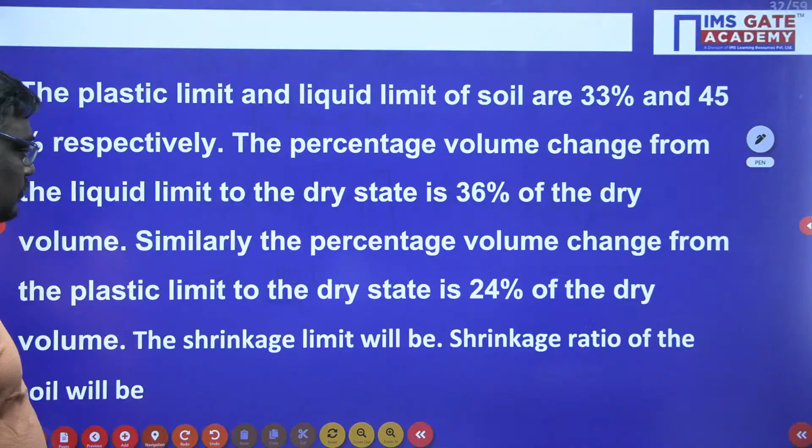Now, it's a beautiful question, sir, a very simple question if you know the concept. The plastic limit and liquid limit of a soil are 33 percent and 45 percent. The percentage volume change from liquid limit to dry state is 36 of the dry volume. Similarly, the percentage volume change from plastic limit to dry state is 24 percent. Calculate the shrinkage limit and shrinkage ratio.

Sir, see, people have to understand the Atterberg limits. Atterberg limits are nothing but the water contents at which soil passes from one state to the other. We have different Atterberg limits: liquid limit, plastic limit, and shrinkage limit. Now, how do you calculate this?

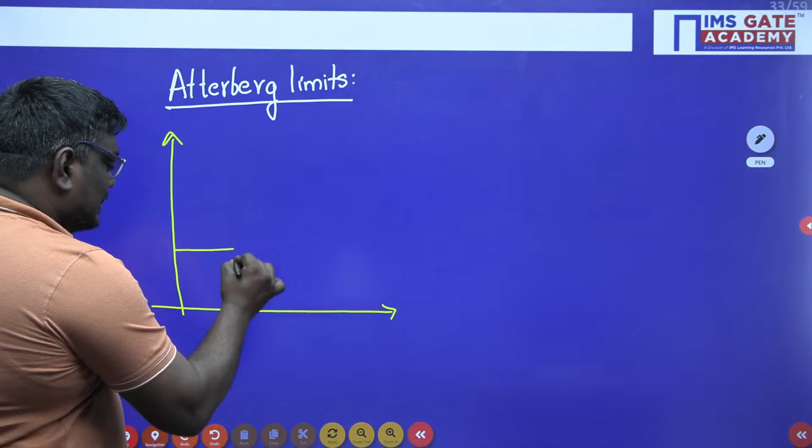Now, see students, if I have this as a graph, and if I consider this as a line, here this point is called liquid limit, this point is called plastic limit, and this point is called shrinkage limit.

This is called dry volume, this is plastic volume, this is volume at liquid limit. So we have different volumes at different states. But in the problem, they have given volume change from liquid limit to dry state is 36 percentile of dry volume.

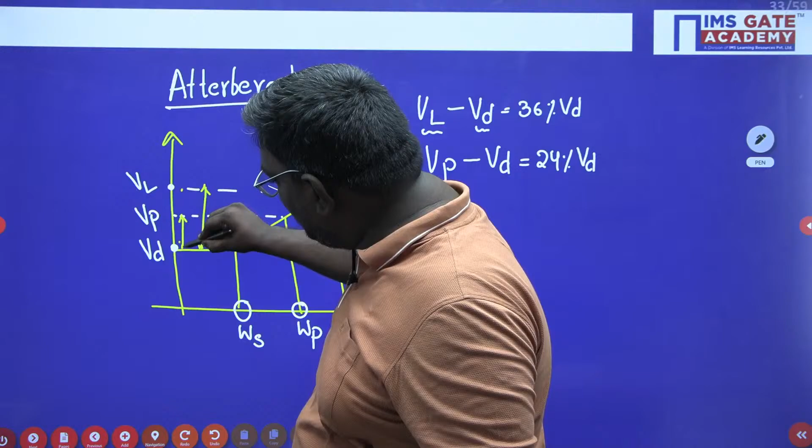Similarly, my dear students, the volume change from plastic state to dry state is 24 percentile of dry volume. So here this change is 36, and this change plastic to dry state is 24. Now what will be this change, sir? Total is 36, this is 24. So 36 minus 24 is 12.

Or you can see this here. The volume change from liquid limit to plastic limit, if you do the both minus, you will get 12 percentile of Vd. Sir, whenever you have seen this chart, you should be evident that the slopes are same. Now if I take the slope, liquid limit minus plastic limit upon corresponding water contents, WL minus WP.

That means what is this, sir? dy by dx, the change in the y coordinate upon the change in the x coordinate. Similarly is equal to Vp minus Vd upon Wp minus Ws.

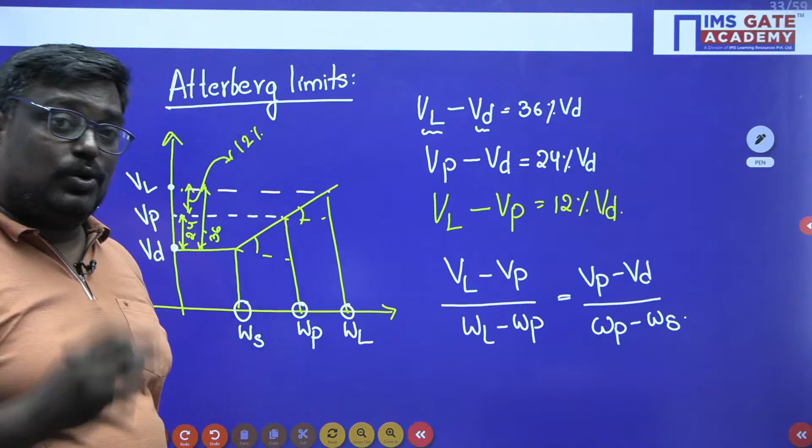Now see students, what is the volume change from liquid limit to plastic limit? It is 12 percentile of Vd. What is liquid limit minus plastic limit? It is 45% minus 33 percentile. And what is the plastic limit to dry limit state? What is the value, sir? It is nothing but the 24 percentile. If I am not wrong, plastic to dry state is 24.

Upon plastic limit is how much, sir? What is plastic limit they have given? 33 minus Ws, so here it will be 1. Now if you solve this, shrinkage limit will be equal to 33 minus 24 percentile, that will be equal to 9 percentile, which is equal to 0.09.

What is shrinkage limit, sir? Shrinkage limit is equal to how much? It is equal to 0.09.

Now what is shrinkage ratio, they can ask you. What is shrinkage ratio? Shrinkage ratio is nothing but the volume change. Sir, this is very important. Volume change expressed in terms of dry volume, to the corresponding change in water contents.

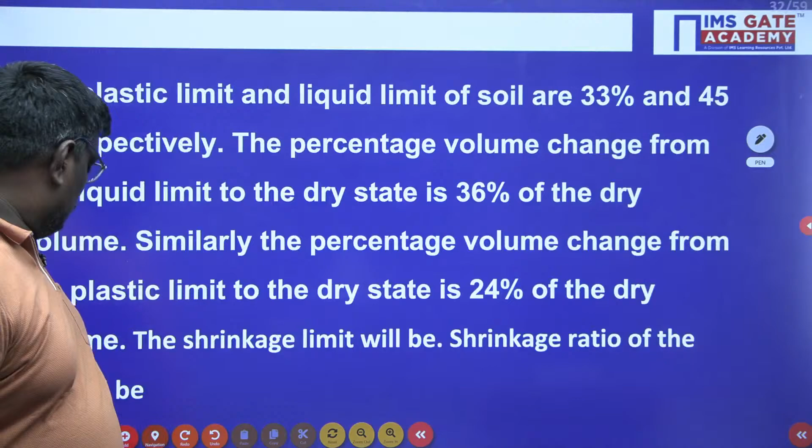See students, whenever you are learning Atterberg limits, you should understand this graph. This graph indicates when it is more than liquid limit, we call it as liquid state. If it is between plastic to liquid, then it is plastic state. If it is between shrinkage and that, this is semi-solid state. And this is less than shrinkage limit, then it is solid state.

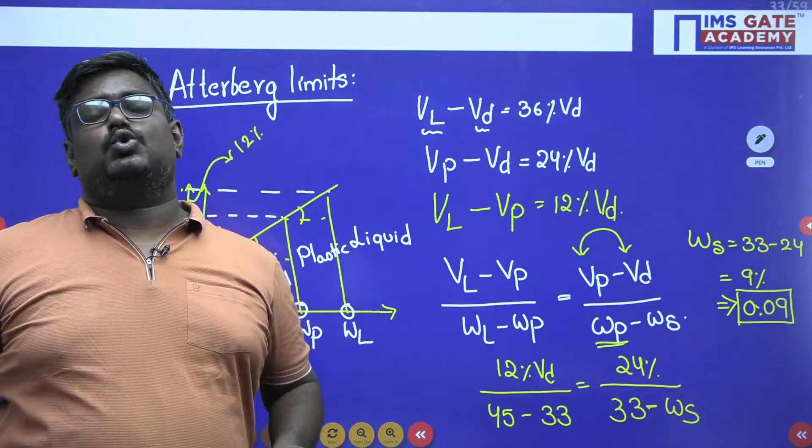So my dear students, all these things you should be aware. What is liquid limit means? It is the water content at which soil has small shear resistance. Plastic limit means it is the water content at which soil can be rolled into 3 mm diameter without breaking. Shrinkage limit means it is the maximum water content up to which any loss of moisture will not cause any change in volume. That means up to shrinkage limit, the volume remains constant.

So this is all about this problem. I hope you have enjoyed this problem.

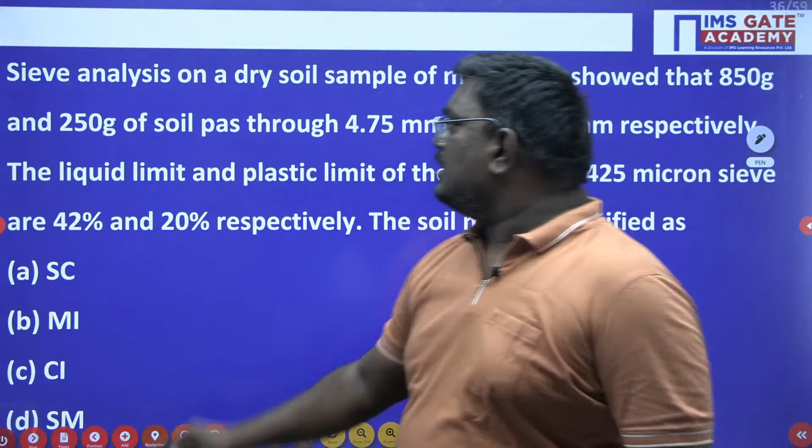Now see students, there was a question here. Sir, actually when you are solving this question, you should have an idea. A sieve analysis on a dry soil sample of mass 1000 grams. Sorry sir, a sieve analysis on a dry soil sample of mass 1000 grams: 850 grams and 250 grams was passing through 4.75 mm and 0.075 mm respectively. Liquid limit and plastic limit of the soil are 42 and 20 percentile. Okay sir, see here, now when I see here 850 grams is passing through.

So here let me tell you, we have one sieve, sir, 4.75 mm sieve. In this sieve, there is almost 850 grams passing. And from this it is passing is 850. From this again 250 is passing through 0.075 mm. Sir, this is very important. Actually, how do you classify fine grained and coarse grained is very important.

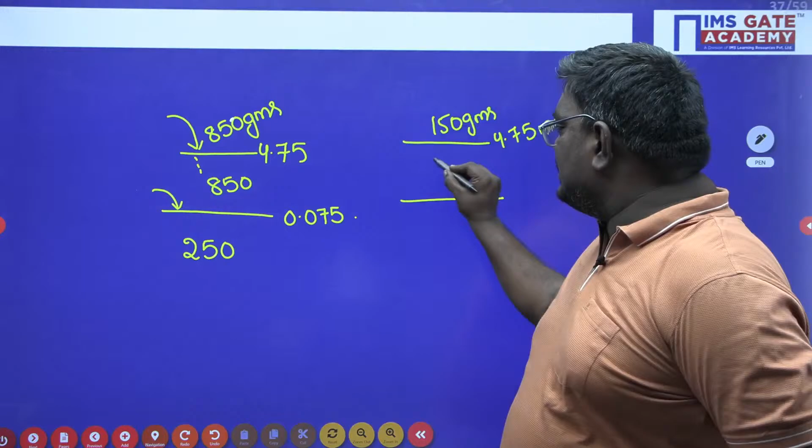So if I consider here 850 grams, 150 grams are retained on 4.75. Out of 850 grams, 250 grams is passing. So what is retained here is 600 grams.

This is very important. And here we have 250 grams. So more than 50% is retained between 4.75 mm and 75 micron. More than 50% is retained, so it is evident that it is a sandy soil.

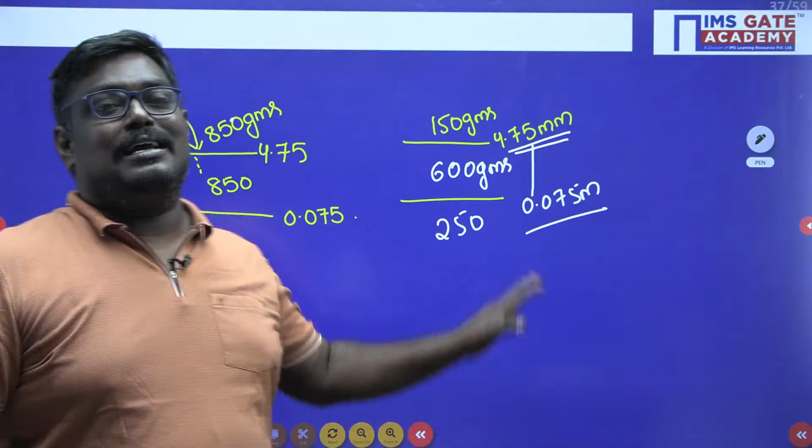This is important, let me tell you one thing. A soil is said to be fine grained if more than 50% is passing through 75 micron. A soil is said to be coarse grained if more than 50% is retained on 75 micron sieve.

But here if you see the sieve sizes, in between these we have sand, and more than 50% is sand. So when you classify the soil, we give importance to the composition of the soil. So it is evident it is sand. Now we have to understand whether it is a silty sand or clayey sand.

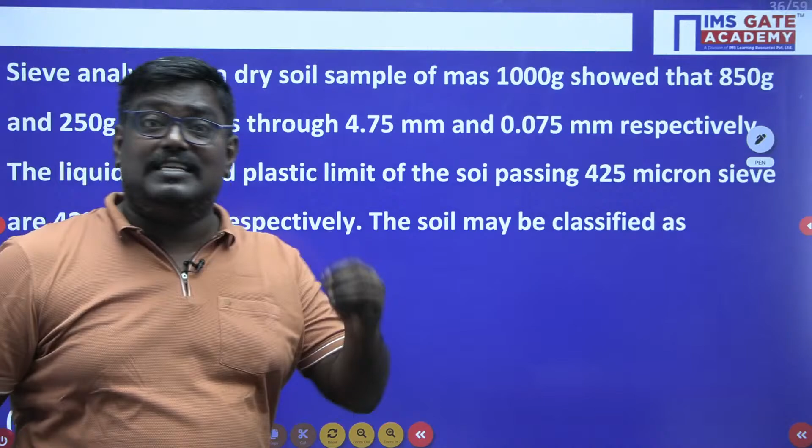Here liquid limit is given as 42, plastic limit is given as 20. Now if I calculate A line, IP is equal to 0.73 into WL minus 20. So if you calculate 0.73 into 42 minus 20, you will get 16.06.

But what is the value from here? It is 22. So A line is located at 16.06, and the value you got is 22. So it is above A line. Above A line means it is clay, below A line means it is silt. So the answer here is SC, which is clayey sand. So the first option is clear.

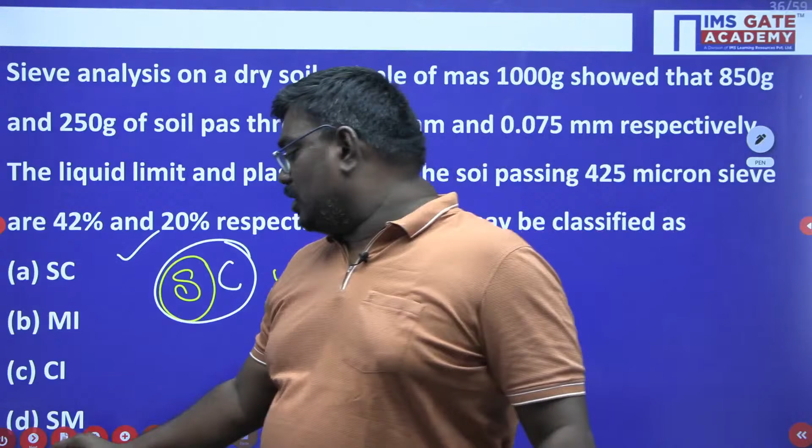In soil composition, you should be giving importance to the composition of the soil. I hope you have enjoyed this question.

Now you know gamma sat is equal to gamma W into G plus E upon 1 plus E. From the problem, gamma sat by gamma W is equal to G plus E upon 1 plus E, and it is 2. So 2 is equal to 2.7 plus E upon 1 plus E. On solving, you will get E is equal to 0.7.

Why I have given this question here is, it might not be challenging, but it shows how to take what is mass specific gravity and what is true specific gravity. True specific gravity will never change. Mass specific gravity changes with respect to the state of the soil.